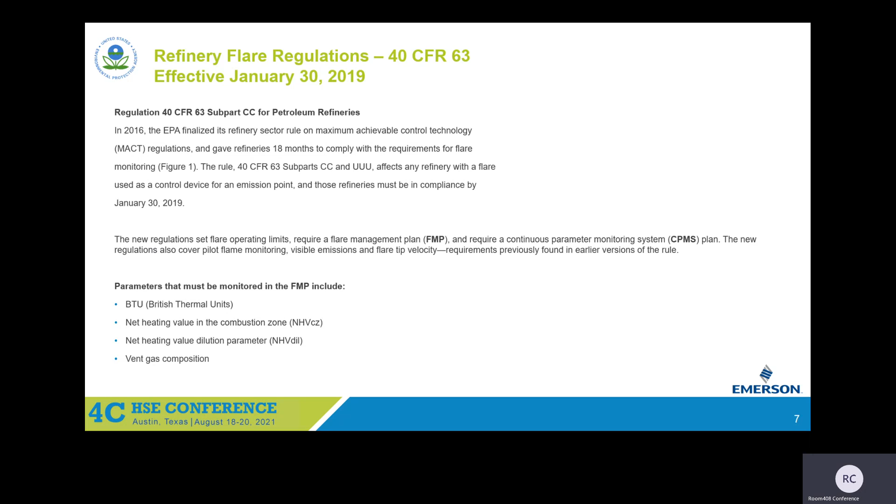Anyway, so the rule actually states, and it's written out again here, but basically it said that within a block of 15 minutes, and this is pretty standard for a lot of the EPA measurements, you have to report the BTU. And it needs to be above a certain limit.

Way back in the old days, before they had to do this measurement, a lot of the refineries would have these towers and they would have these viewing platforms that they view the flare. I don't know if you guys have ever seen those, or if you guys are from refineries and seen those, but basically if there was an event happening in a refinery, and again, nobody wants an event happening. Nobody wants to send something to the flare that's going to cause an issue, but sometimes when you're making product, you don't have an option. Something goes wrong, you got to get rid of it.

So somebody would actually be out on the viewing station, if somebody said, hey, we're watching the DCS, watching the SCADA, there's a problem on this unit, the butane unit's got a problem, we have to dump. Somebody would actually go out and watch the flame, watch the flare. And they would then do assist gas, or they would do steam, trying to get the steam up to get the heat up to basically quench, because it was called the smokeless. You don't want to have any smoke there.

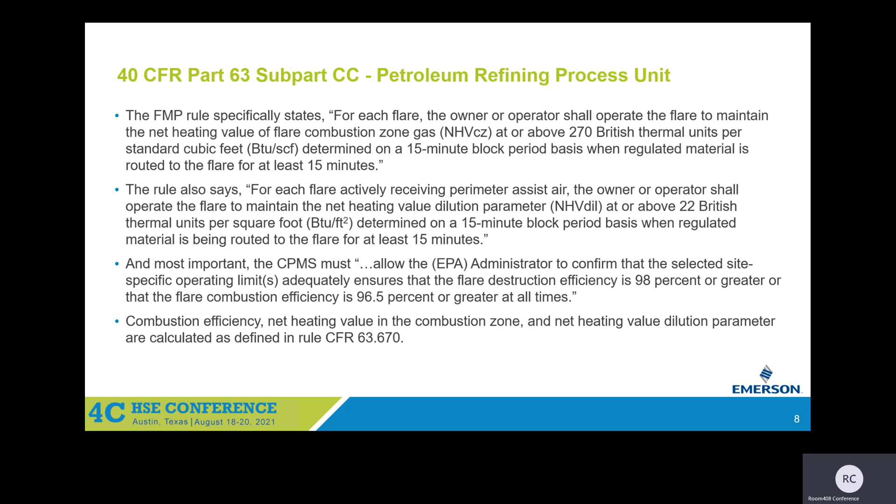All right. And because this is a GC talk, I'm going to talk about GCs. One thing I want to mention here is that 15-minute rule. Whenever the 15-minute rule came in, nobody had any issues with 15 minutes, because 15 minutes is a long time to do a measurement. But what a lot of the operators started doing, they said, you know what? I can get rid of that guy that's standing out on that platform looking at that flare

if I can optimize my flare. So if I have to measure the BTU, and I can tell what the BTU in the flare is very quickly, then I can optimize the assist gas and the quenching. So basically, instead of putting a whole lot of steam up there to get it hot and not knowing how much money I'm spending doing that, I can control this now and save money.

So this is where certain analyzers came into their own. Because with a gas chromatograph, if you have familiarity with one, the best thing about it is it's one of the only techniques that I'm aware of that does a measurement without an interference. It separates out all of the components and measures them one by one. The other techniques don't do that.

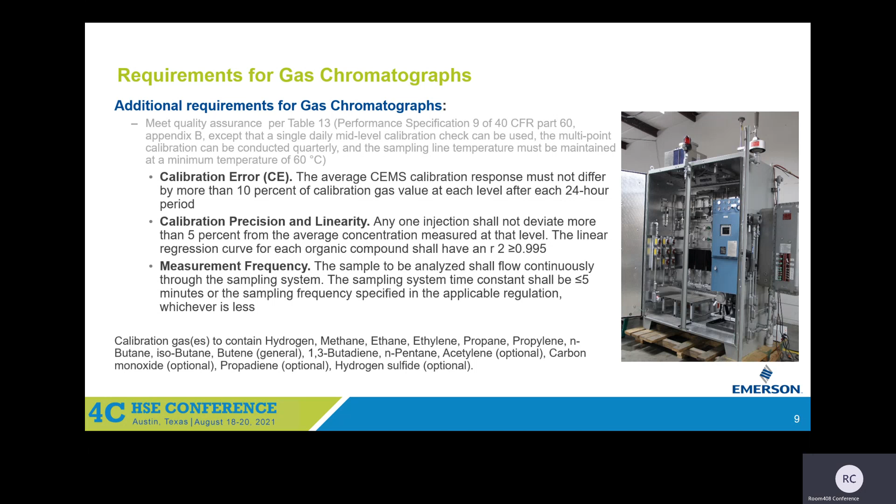I don't think I've got any competition in here, but if they are, I'm not killing anybody here, I'm just showing some pros and cons of each technology. So gas chromatographs, I'm talking about the big guys here. It's basically you have your ABB, you have Siemens, Yokogawa, and Emerson. Okay. If you're in a refinery or in a plant or somewhere, you would have seen these guys. Okay.

So I give a little bit of a spiel over here and talk a little bit about what components, composition. But if you look at the bullet points, which are sort of more important, I have some tick marks for the good points, and I have some little reds for the bad points. Just having a look at the time.

So here we have this keyword, slow analysis for flare BTU control. And I'm going to address that in a later slide. Typically for gas chromatographs I'm talking about. But they can be mounted outside. They can be configured to do multiple streams. And the familiarity is the biggest one right here. Gas chromatographs have been in refineries for a very long time. A lot of people are familiar with the technology.

Mass spectrometers. Here's the main suppliers again, Thermo Fisher, Extrel, Schneider. Thermo Fisher and Extrel are actually here. And this is some history. Refineries have typically steered away from mass spectrometers. And that's not me saying that. Like I said, I spent 20 years with Thermo Fisher. I struggled to get a mass spectrometer into refineries.

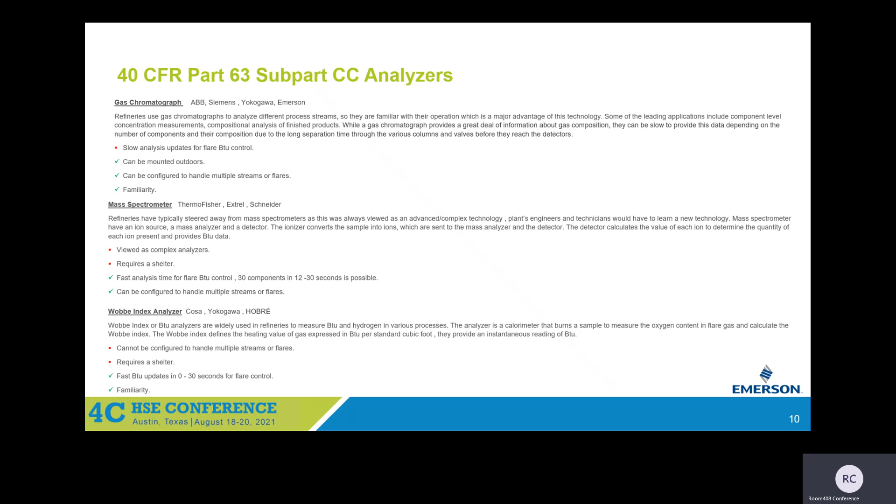So that just gives you sort of an overview of the measurements that have been done for this 40 CFR. If you have any questions specifically on the slide, just raise your hand and we can do them at the end.

So here's a typical flare measurement. Here's our gas chromatograph doing a measurement. As you can see, it's going to be measuring the supplemental gas going up into the flare. There are some other Emerson products here. This one we actually have at the booth. It's a PRV, basically showing you if there's any leak happening on a valve. And then some other wireless devices here.

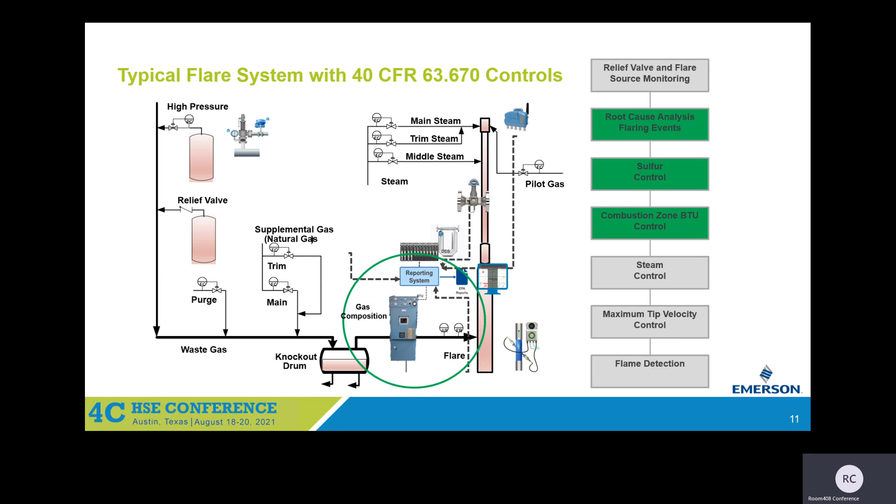And then there's a Fluenta device. Fluenta, we partnered with a lot on doing the flow measurement. They're also here. So if you look at the Fluenta booth, GE has a big booth. GE does the same. Okay, they're measuring the flow. That's one of the other requirements.

All right, so this is going to get a little bit into the technical part of things. So how do we do the measurement? How's it possible that a gas chromatograph can do this?

So what we did is we took the GC, and we said, how can we make this GC do two measurements? Well, if you put two GCs in the place, sample came in, went to the one GC, then went to the other GC, and this GC just did a quick measurement, and this did a longer measurement, you could get it done. But now you have two GCs.

So what we decided to do, and we have now the capability of doing what we call two clocks. Think of the clocks as being GCs in a way. This is the brains, the processors inside the GC. When you are doing an analysis, your processor is doing a lot of work. The processor is getting all the information, processing it, calculating everything out. It's then doing the software part of it, and it's then transmitting out. So it's typically a busy device.

So what happens if we put two processors in there? So we can separate out. One can do one thing, one can do another thing. Then you get limited by size inside the GC because, again, I think everybody said they had a basic understanding of gas chromatographs. Gas chromatographs have valves inside of them and columns. That's how they separate out.

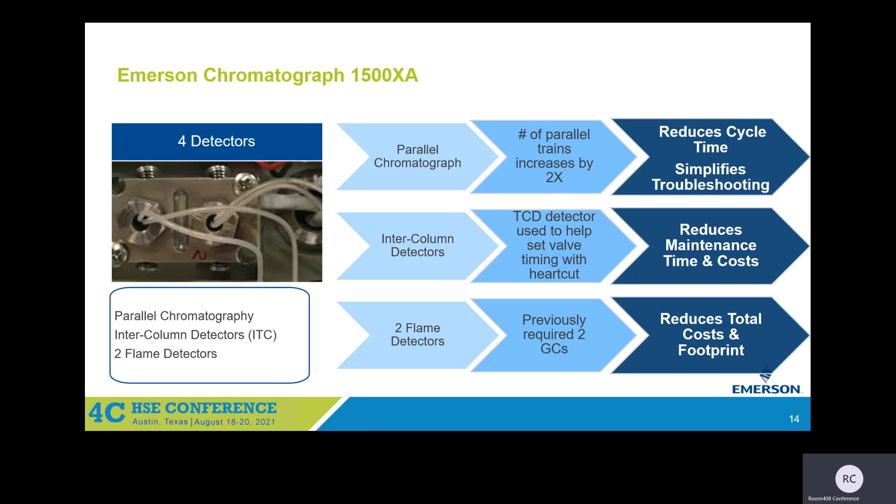All right. So then we get to this word over here that we call parallel chromatography. What parallel chromatography basically means is that we have the same thing I just mentioned. We have 2 sets of measurements happening through the GC, each going to their own processor.

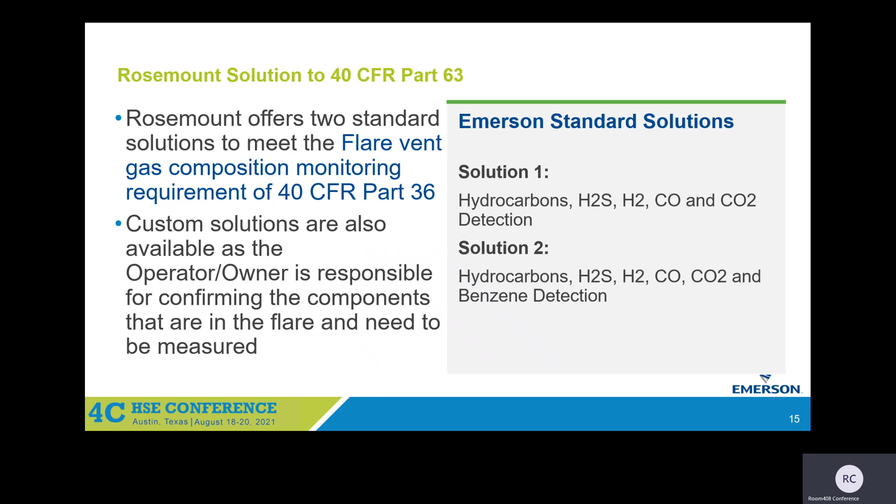So here's a little overview. Benzene is typically going to be a longer measurement, more towards 8 to 12 minutes. Without benzene, it's a little bit of a shorter measurement, because benzene is problematic. I wouldn't say problematic, it just takes a long time to come out of a GC. Okay.

The typical setup will have four thermal conductivity detectors and two carrier gases. There's the packed columns and some valves, and it does require instrument air. And the sample is a vapor. We haven't even spoken about sample conditioning, and that's not part of this talk. I think the mass spec guys and the others will tell you the same: probably the most important part of any of this measurement is your sample conditioning.

The sample coming out of a flare is typically pretty horrible. It can be full of anything, sulfurs, water. So if you're pricing out this package and you're responsible for telling the company we need to look at these technologies, you spend $100,000, $200,000, $300,000 on an analyzer. The actual solution is probably going to be $1 million, because you might need a shelter. That's a lot of money.

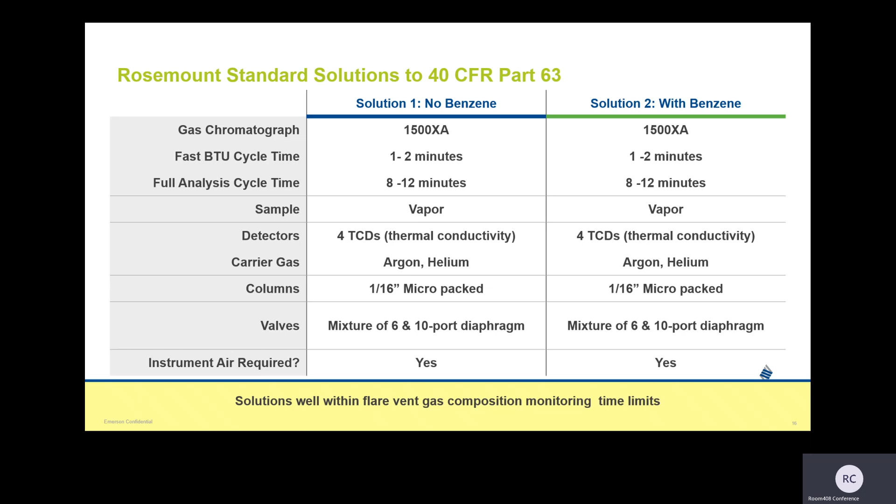Yes, sir? Question: what benzene level are you targeting in the flare, ppm or ppb? I'll have it on the next slide; it'll show you a level. So again, be very cognizant of the other requirements that are not just your GC. If you have a look here, on this one it's up to 5% benzene.

Sometimes the guys sitting in the room are GC guys and they're familiar with the measurement, so it would be remiss of me if I didn't explain a little bit how the measurement gets done. I'll keep it very high level. Like I said, we're going to do a BTU measurement on the major components. We individually measure nitrogen and oxygen as one. Okay?

Carbon dioxide, hydrogen, methane, ethane, and ethylene are all measured individually, so we have to have a specific column set for that. If you know anything about GCs, the quickest way to do a GC measurement is backflush. That means when you take a whole lot of components, you might send them to one column set, and then send them to the detector all together. This is called backflush. Why do you do that?

If somebody decides that they don't want to measure C3, C4, C5, C6, C7s, because it's inconsequential in their process, it's so small, they'd rather have the speed, you can design a column set and have a valve that switches that basically lets everything else get through, holds on to those for a while, they eventually juggle their way through, get to the valve switches, and it sends them back to be detected. And you can get those backflush components out in 30, 40 seconds, but it's one peak.

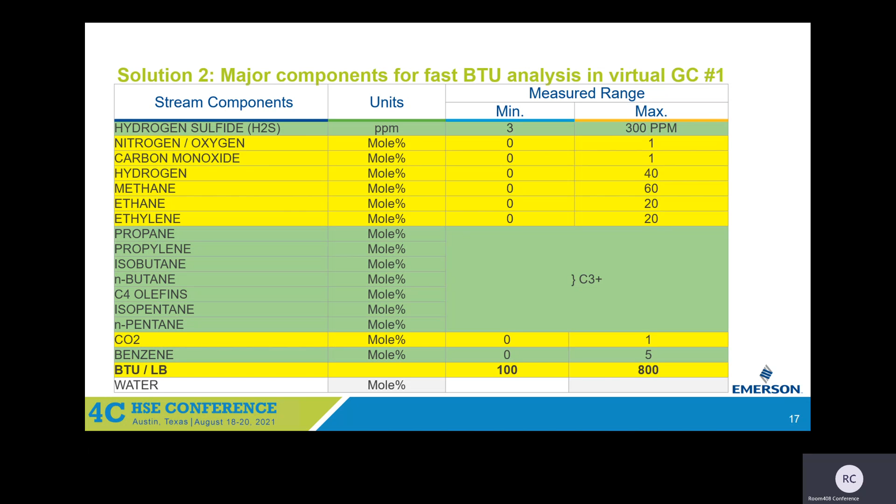Which is called virtual GC2. It's the same GC, it's just going through a different set. Measures the individual components. Isopentane and the n-pentane, it'll lump together as a C5. So that's going to be your 8 to 12 minute analysis. So what's going to happen is your system's going to be updating every minute, 1 to 2 minutes, depending. I say 1 to 2 because if you had a very simple composition in the flare, you could probably do it much quicker, 1 minute. If it was more complex, we have some doing 90 seconds.

Okay. So people say, well, 90 seconds, 1 minute, that's great, 2 minutes, okay, but the mass spec does it in 30 seconds. So talking to refineries and talking to the customers, that 30 seconds is fantastic, but they can control in 1 to 2 minutes. 1 to 2 minutes is fine for them to control. They cannot control in 10 minutes. It's too late. So these guys, if you can give them a 1 minute, a 90-second analysis, they say that's enough for my control. Because again, why wouldn't they just go to the mass spec?

Well, we start talking about, again, complexity of the measurement, complexity of the analyzer. A gas chromatograph uses 1 calibration gas. How many calibration gases does a mass spec use? 1 for each component. And like I said, I lived in the world of mass spec. I went to Shell Norco 1 year. And the customer had been having some issues with his mass spec. So we went and looked and we fixed it. I was an application engineer at that time. And then we went to calibrate.

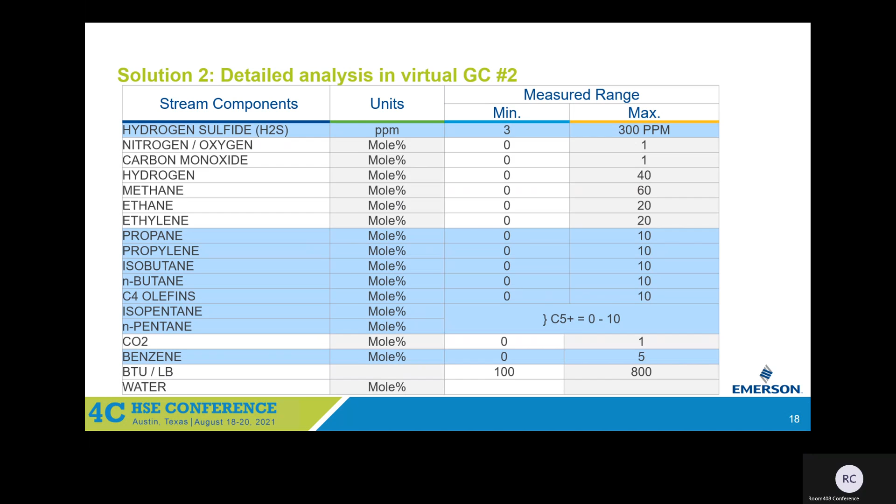All right. And then we combine the two, and this is basically a combined analysis done.

So, just want to see how we're doing for time. About 5 minutes.

Okay. So again, just showing you, different carriers, different trains, and different detectors.

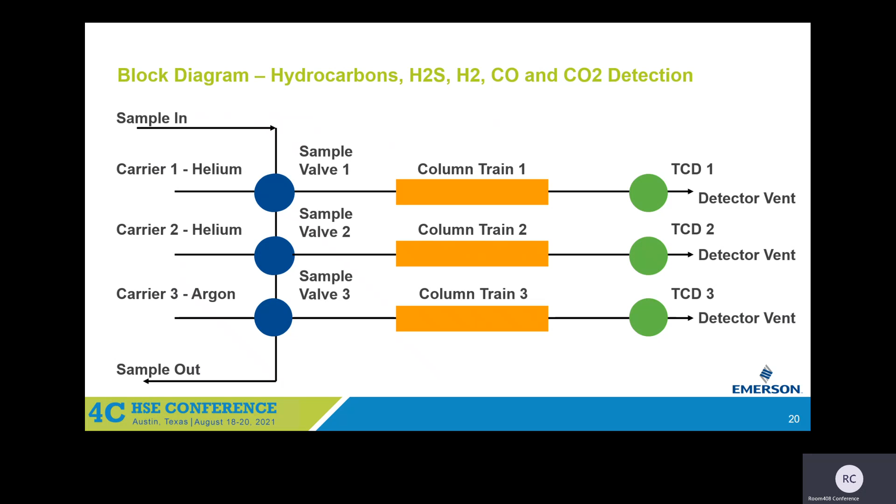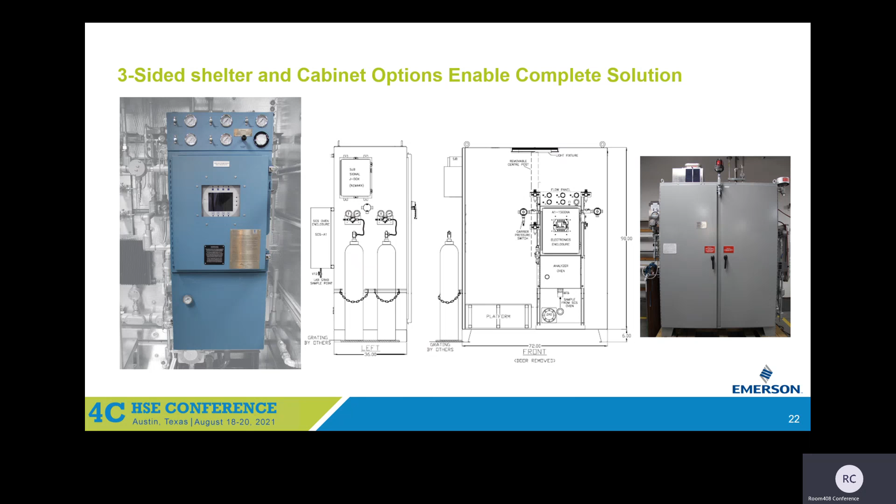I'm speeding up a little bit because there might be a couple of questions. And then we have all the support material on our site for this.

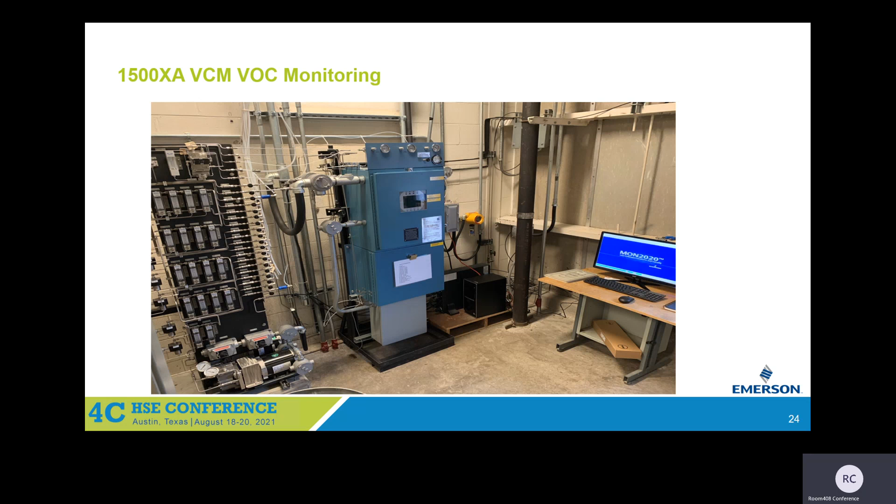Okay, VOC, because I had to slide this in. So a VOC measurement is something else that you're doing on your sites. Some type of VOC is typically being done. This specific unit we just installed is doing VCM, vinyl chloride. What's of interest, and you'll see on the next slide, is this sample conditioning system. This is doing 20 samples and has a pump. The reason it has a pump is this is ambient air monitoring, so it's pulling in samples.

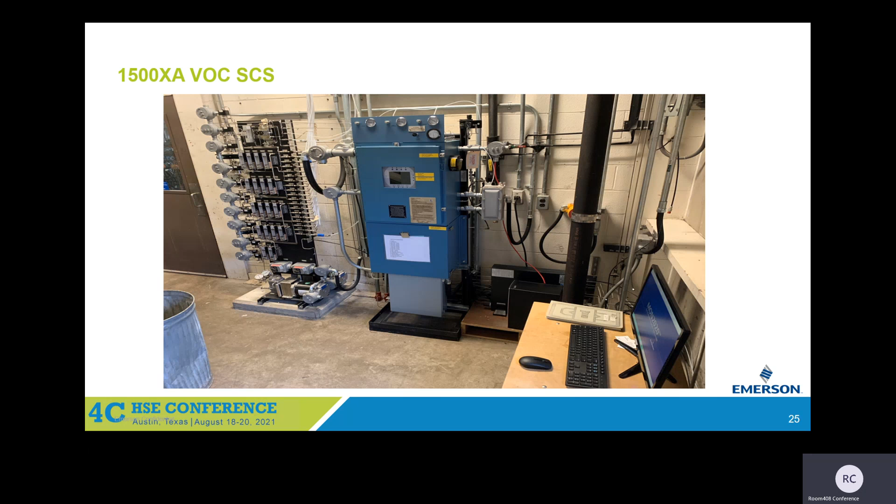We put this unit into the customer site and it worked fantastic, and then the customer called us up and said, yeah, your analyzer is not working, there's a problem. So the guys went out there and had a look, and fence line monitoring had something that happened, and basically the sample point had ended up, this is in Louisiana, in the swamp, and basically filled up this pump and all these with water. But I wanted to mention this because a gas chromatograph can also do fence line monitoring, and there's quite a few out there doing that. But same model.

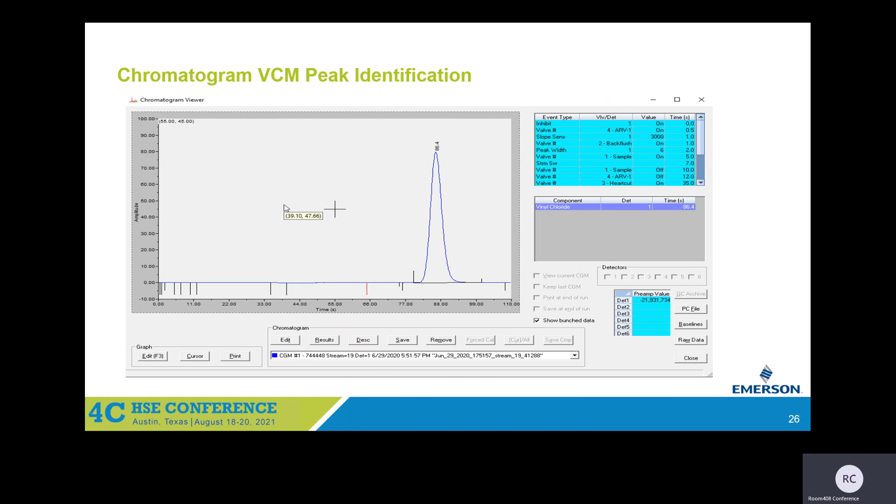There's other ways to do VCM. I've seen them because I've been out there and looked at them. But again, if you guys have familiarity with gas chromatographs, it's possible to do this measurement on a gas chromatograph. It's been done. I think we've got like 2 or 3 minutes left. So if there's any questions.

Yes, sir. So may I ask you, when you say VOCs, it's a big term to use. What specifically are those VOCs? Is it benzene? I've heard that normally people refer to VOCs as benzene, toluene, xylene. Is this under that umbrella, or are you talking about methane? Yeah, again, it would depend. So yeah, BTEX, correct, is, as you said, benzene, toluene, ethylbenzene, and xylene.

The problem with those type of measurements is, I wouldn't say it's a problem. They're actually a federally mandated measurement right now in LNG because of the fact that we export it. It's not a US regulation, but it's an export regulation. So those measurements get done actually in pipeline. If you had a plant, yeah, you could do those too.

Typically, what you would do with those three, you can do it two ways. You can either individually measure them, which means a much longer measurement, or you just have a BTEX measurement, which is all of them, and a limit on the BTEX. Specifically, they're going to be like under 2 ppm. I think that's fair. But yeah, you can lump those as one, and you do benzene, ethylene chloride, something else. It depends on your plant. Depends on if you're a Formosa plant, what is going to be your BTEX.